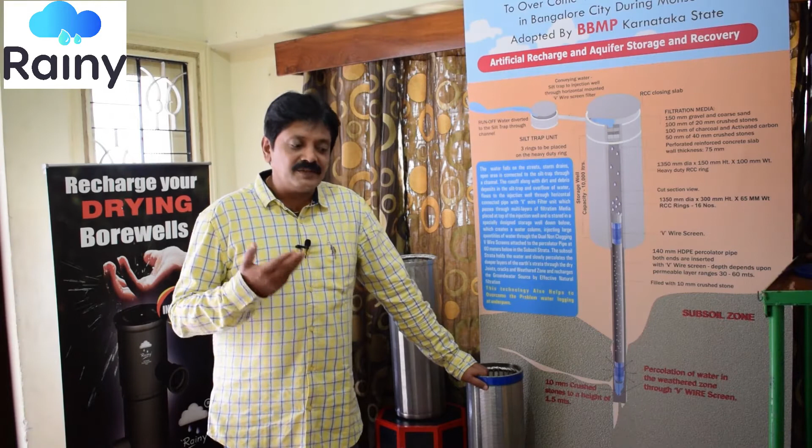In India, more than 65% of the water requirement is met by groundwater today. In industrial use, agriculture use and many of your drinking water needs, we have been using the groundwater. But with the groundwater falling 1 meter every year, the days are not far when we will find zero water in the ground. Why is the groundwater not getting recharged? There are 2 or 3 main reasons.

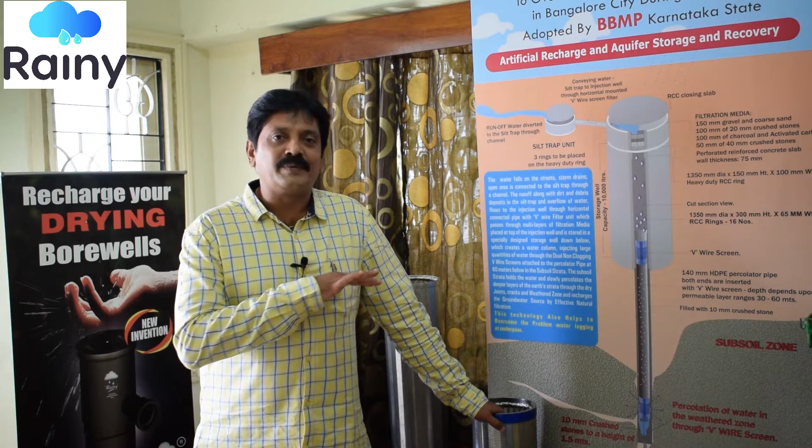One is, if you have seen these days, everywhere we are trying to cover the surface. We are either laying tar on it or putting paver blocks. So we are not leaving any place for the water to percolate. In our school days, all the school fields were open. If you go to any of your children's schools today, you will find that either all the playgrounds are paved, or we have put synthetic lawns, which don't allow the water to percolate. So the water table is falling.

Another reason is climatic change. Though we get the average annual rainfall, and in the last 40 years the rainfall has not come down, because of global warming and its effects, the intensity of the rainfall has changed. Whatever we used to get in 24 hours earlier, today we get in 1 hour. So when we get heavy rainfall in a short span of time, percolation will not happen and the water will run off. That is also one of the major reasons. And people have forgotten to recharge.

Earlier, everywhere we had a lot of lakes. Bangalore was called a city of lakes. We had about 1000 lakes. Today we are left with hardly 141 lakes. We have closed the lakes and turned them into commercial complexes, bus stands, railway stations, major playgrounds and stadiums. We thought that lakes are not very important, but lakes play a very vital role in recharging the groundwater.

Wherever there were low-lying areas in the cities, there were lakes. The water from everywhere used to flow to these lakes and get percolated there. But now with the closing of the lakes, the water percolation has come down. And as I told you earlier, we have paved each and every area; if you go out and see, we don't find any open area for the water to percolate at all. That is one of the reasons the water table is falling very drastically.

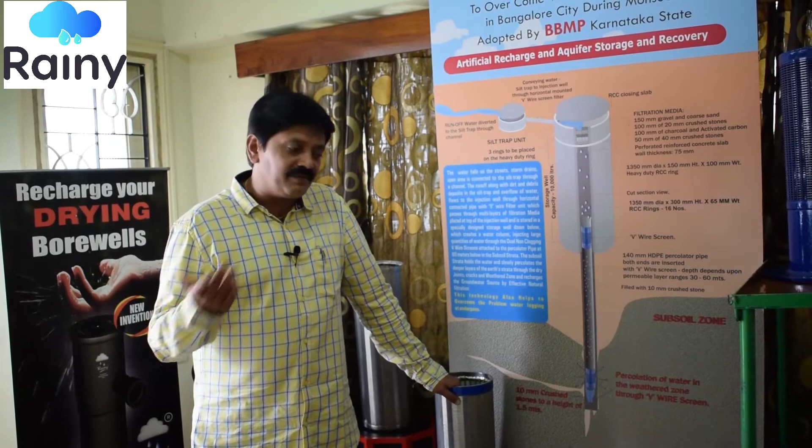Otherwise, we cannot leave the surface running water into the borewells. This is because the water will be muddy, and we cannot remove all the mud, so it will fill up the borewell and close the water sources. That's one. Second is, we don't know the source of the water. The water coming on the surface may be contaminated, so leaving it into the aquifer is always dangerous. We may contaminate the whole aquifer. So what is the next best methodology to recharge the borewell?

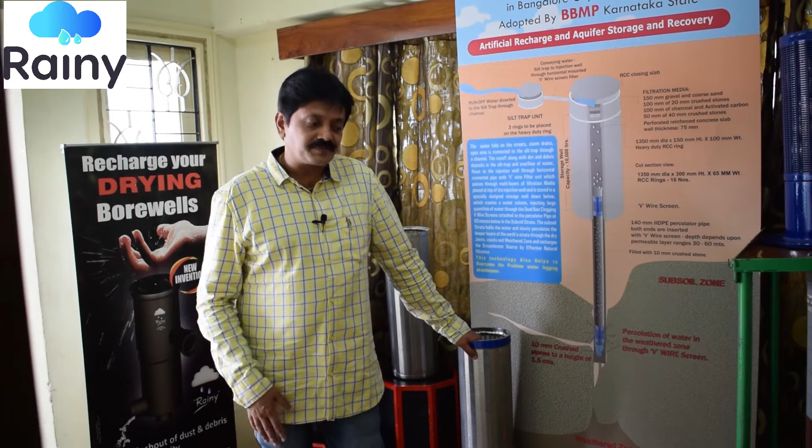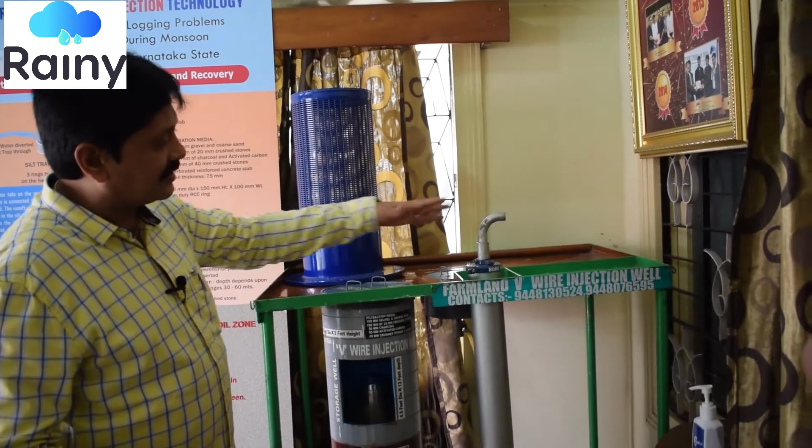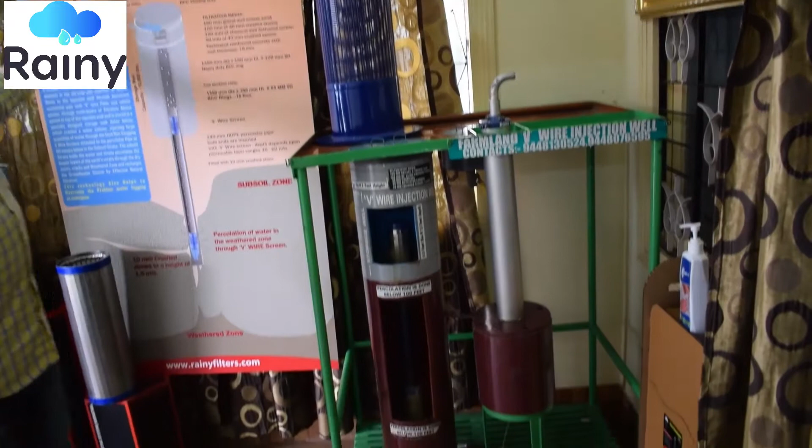Today I will introduce to you a first of its kind innovative recharging methodology, wherein we recharge the borewell, but we don't recharge the borewell directly. If you see here, it's just a model to show you how things are. This is a borewell. We don't recharge the water flowing from the surface into the borewell, but we leave the water next to the borewell. We drill one more borewell. Here you can see exactly what we can do. I can explain here.

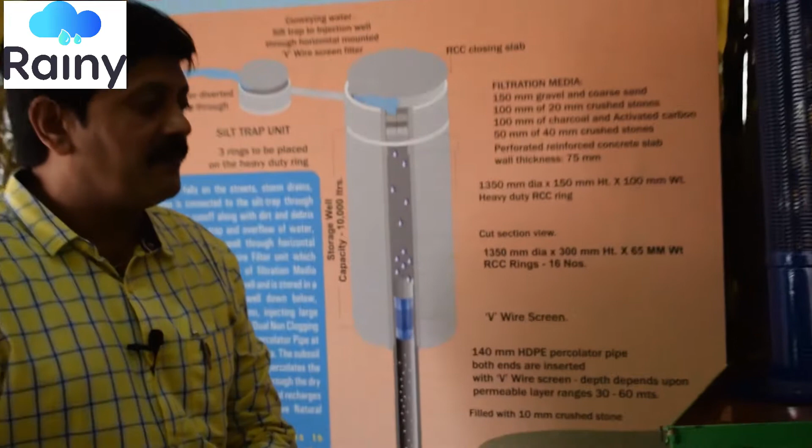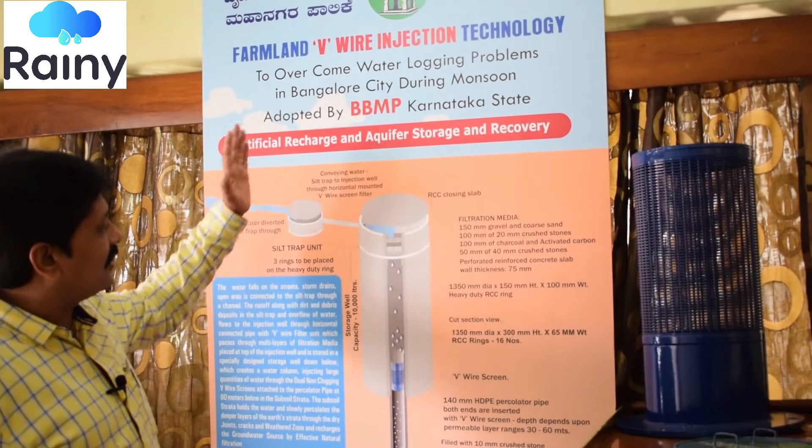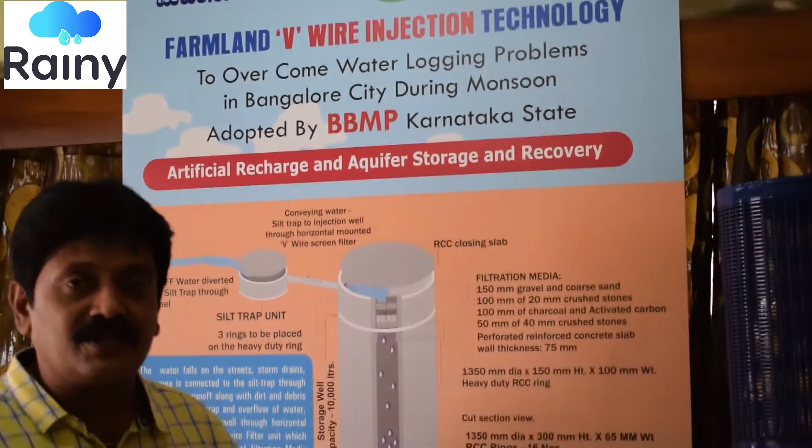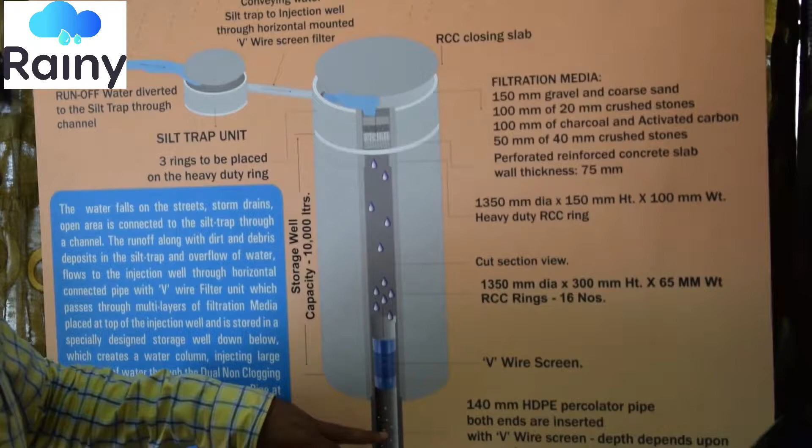We find that zone, and then about 15 to 20 feet away from the borewell, after the geophysical survey, we drill a borewell up to the first permeable zone. We drill about an 8.5 inch borewell to the first permeable zone. We don't go to the aquifer. I would just like to clarify once again, we don't go to the aquifer, but we go to the first permeable zone.

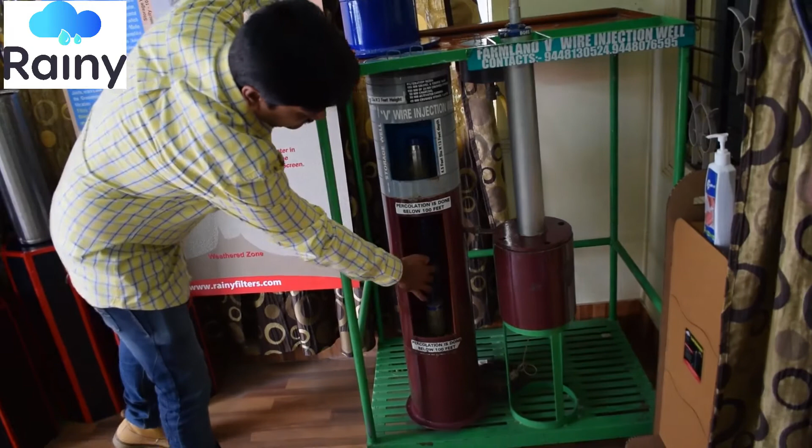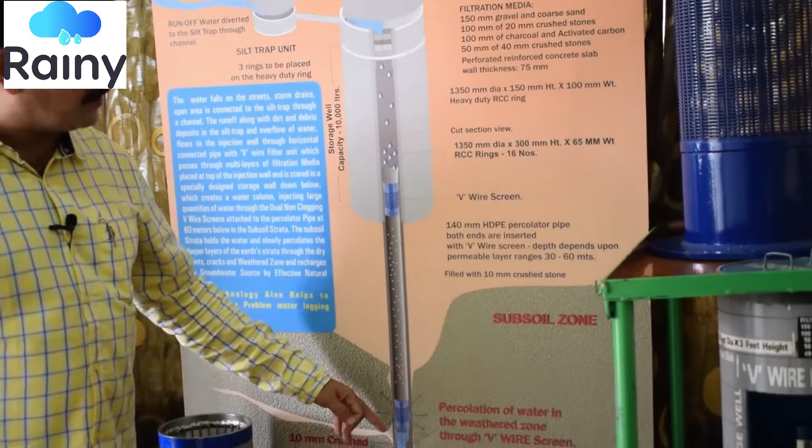After drilling the 8.5 inch borewell, we insert one zigzag perforated high density polyethylene pipe. You can see here the high density polyethylene pipes, which are zigzag perforated. You can see in this picture. This kind of 5 inch pipe is inserted in the 8.5 inch borewell. Before inserting the pipe, we connect one V-wire screen. This is a special component, the V-wire screen, which is made of SS304.

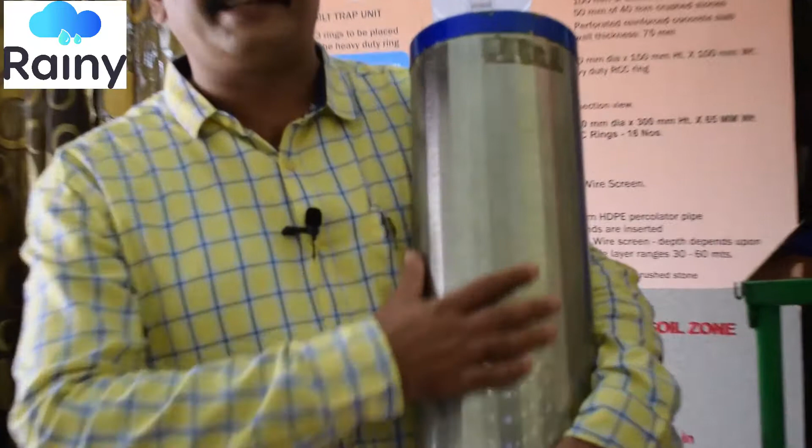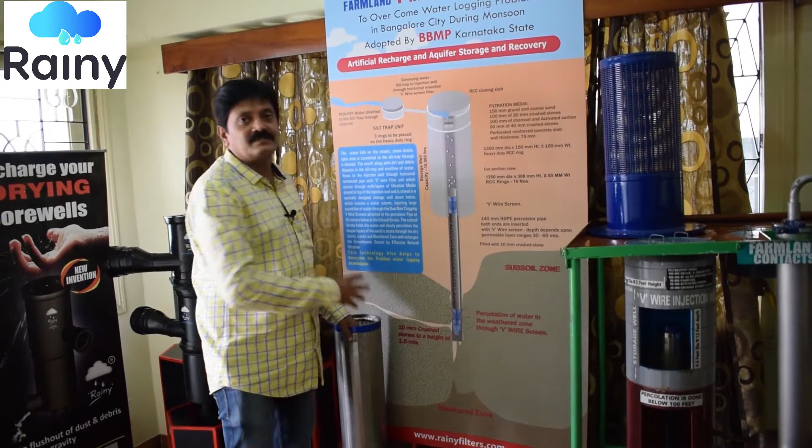If you see externally, it is totally flat. But internally, you can see here, it is V-shaped. So this special component doesn't allow any silt or sand particles to enter inside, but will allow a large quantity of water to get inside the borewell because of its wide opening. You can see it is totally open, externally flat and internally V-shaped. Because of this formation of the V-wire screen, it will not allow any of the silt to enter.

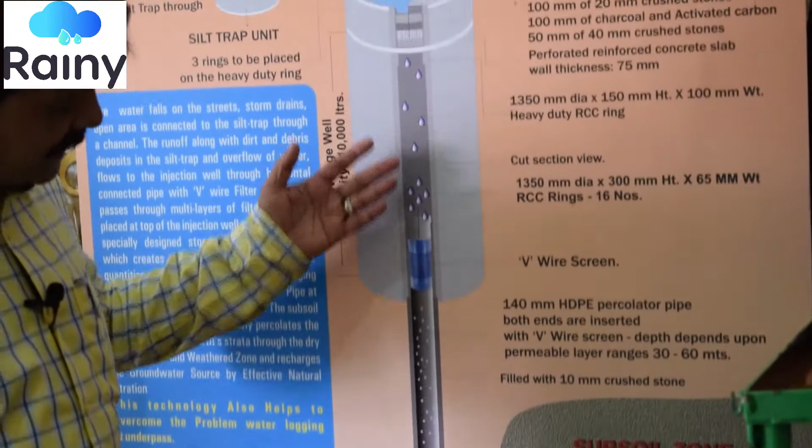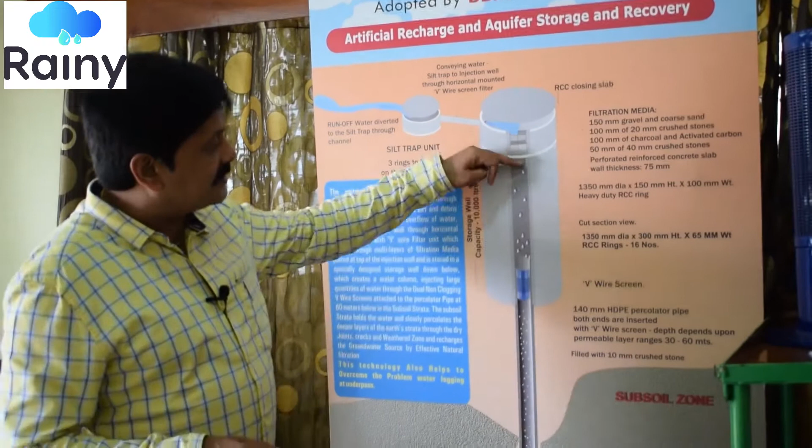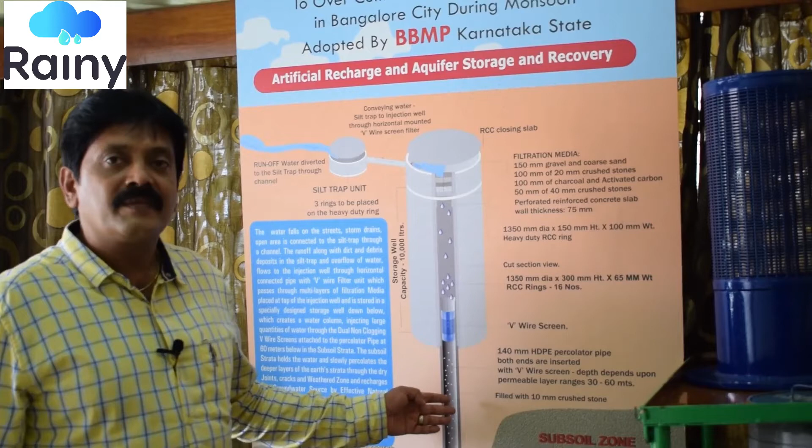So what we do is, when you are inserting the pipe, we fix a V wire screen at the bottom. So this pipe is inserted inside, and there is a gap between the pipe and the drilled bore, because we have drilled 8.5 inches and inserted only a 5 inch pipe. So once the pipe is inserted, we fill the surrounding of that pipe with 10 mm gravel stones. This gravel filling will help us not to allow any of the sand or the mud to cave into the pipe, and it will facilitate the entry or exit of the water from the pipe.

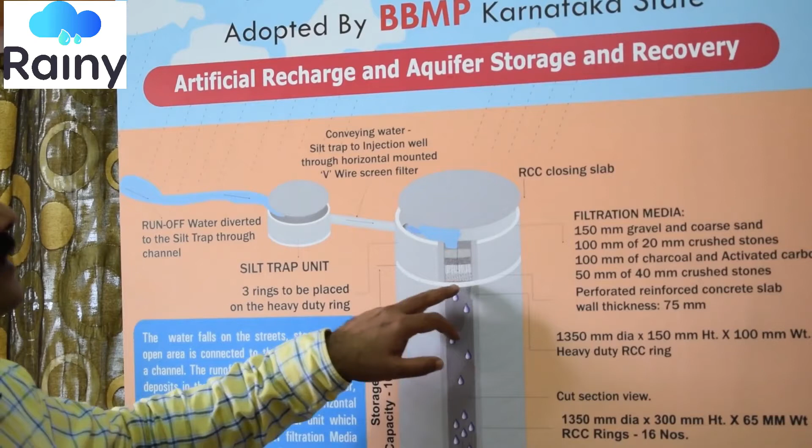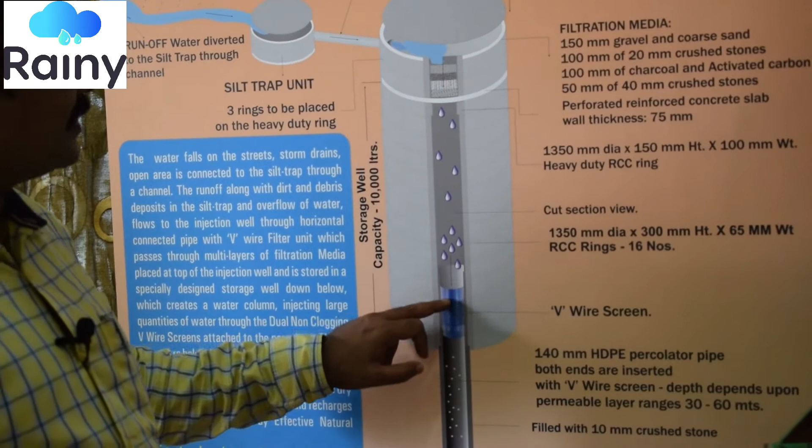So once this is done, we make a well of about 15 feet surrounding this pipe. When the well is completed, we insert reinforced cement concrete rings, one above the other, to about 15 to 18 feet depending upon the soil conditions. Once it is inserted, we insert a perforated slab over it. Once the slab is inserted, we cut the pipe which would have been inserted here, and insert one more V wire screen at the bottom of the well. So this will be the entry point of the water, and the screen at the bottom is the exit point of the rainwater.

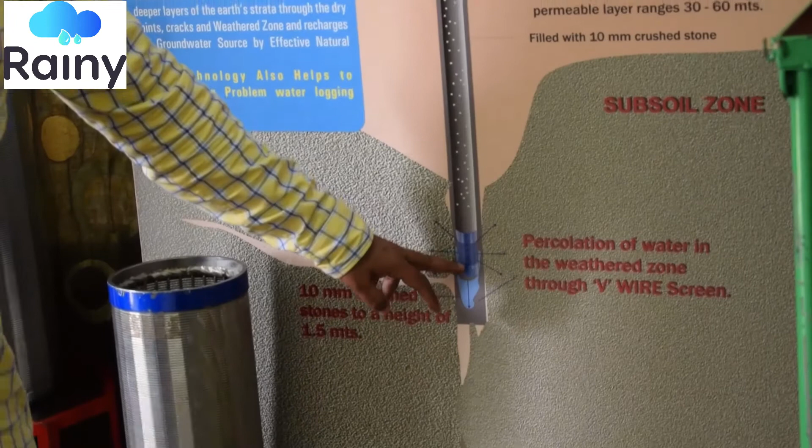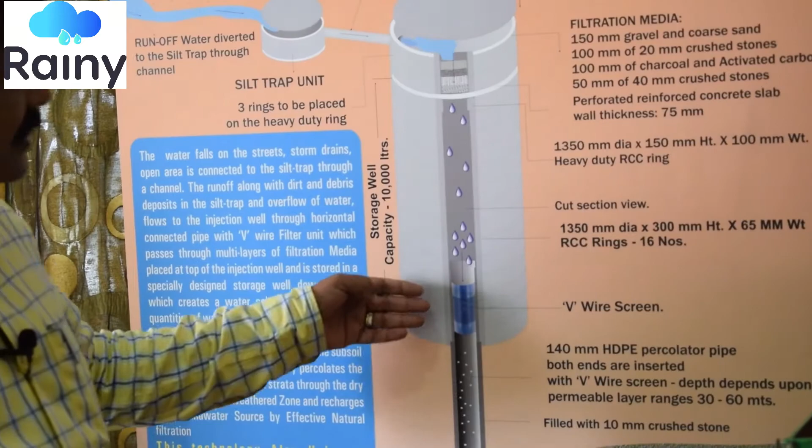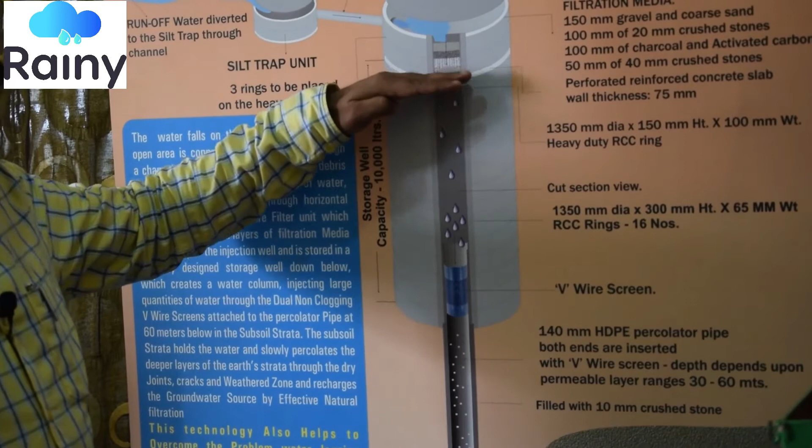Once this V wire screen is inserted, there is an end cap which is fixed to the screen, so that the water from the top should not go; the water should only enter from the sides of the screen. Once this is completed, this well is left completely empty, because this acts as a storage tank, and because of its height, a water column is created. So when the water gets filled into it, it creates that water column, so that it can send the water inside with pressure.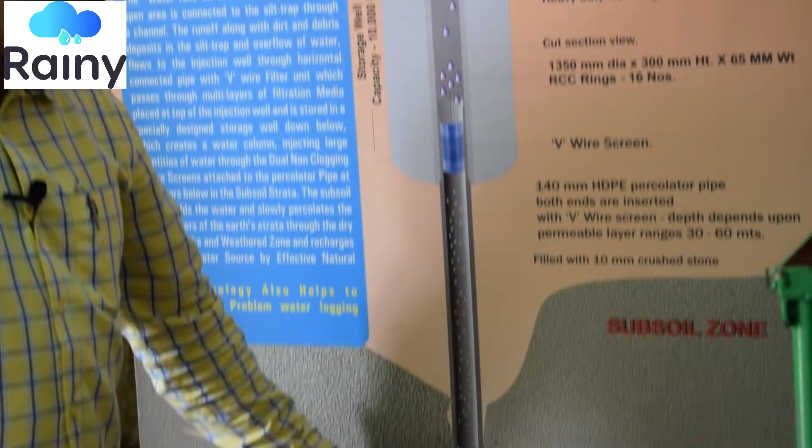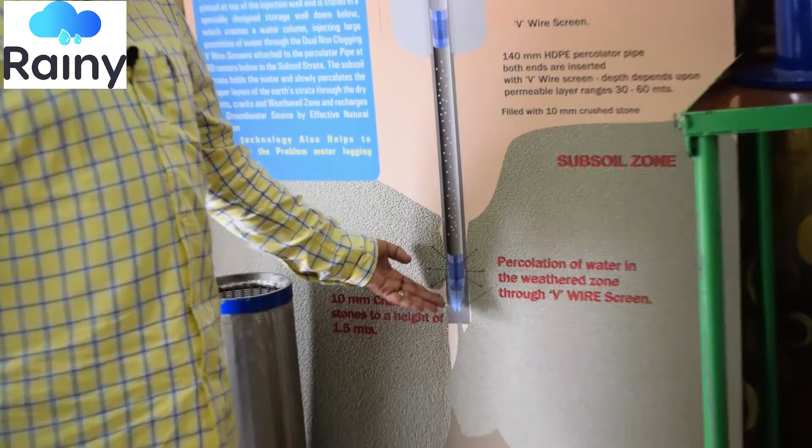When you measure the water pressure here, according to the depth, you will find about 3 to 6 bar pressure at the bottom. So with the pressure, the water can enter into the ground. It will open up the dry joints and fractures in the ground also.

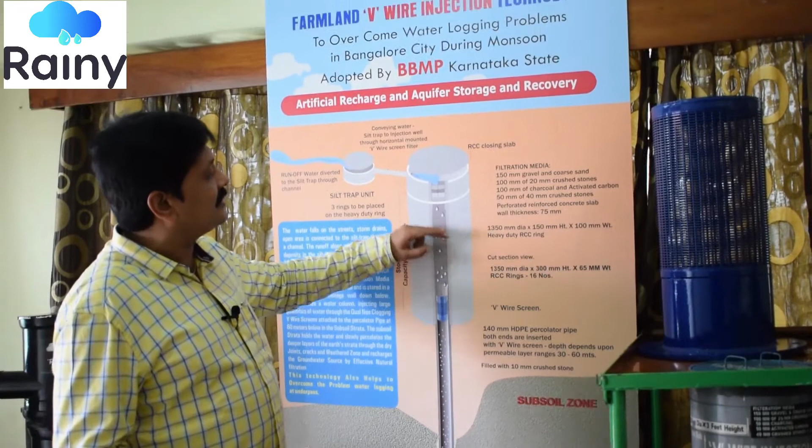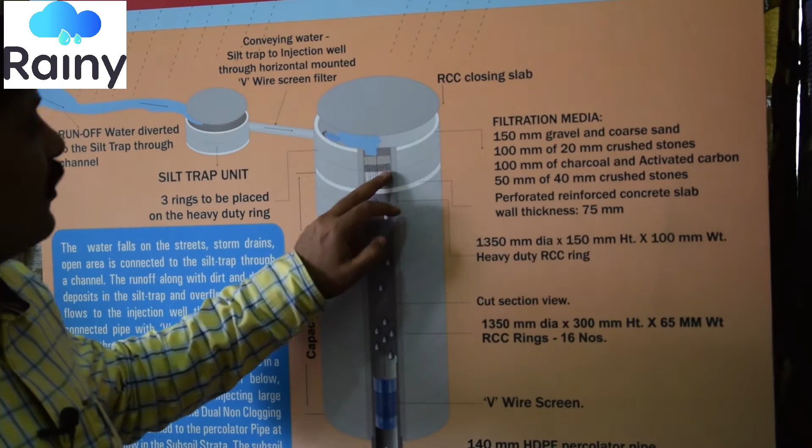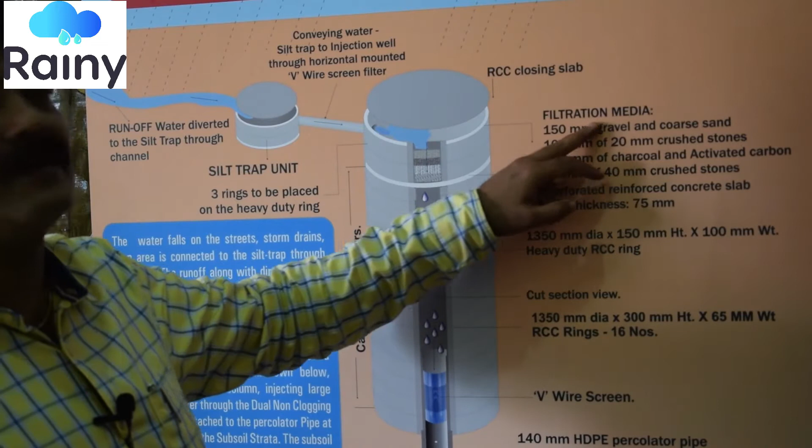So after the completion of the installation here, as I said, once the slab is put, on the slab we put the filtration media. First we put 40 mm crushed stone. On the 40 mm crushed stone, we put wood-burnt charcoal. On the wood-burnt charcoal, we put 20 mm crushed stone, and then we put activated carbon on this. On that, we put gravel and coarse sand. So this acts as a fortified filtration media.

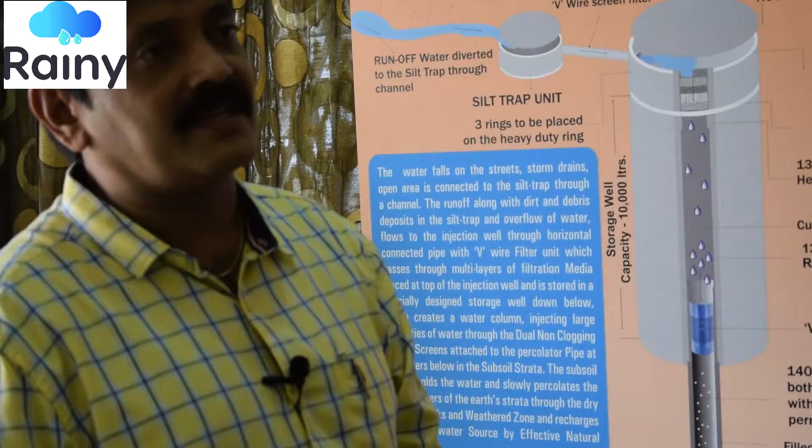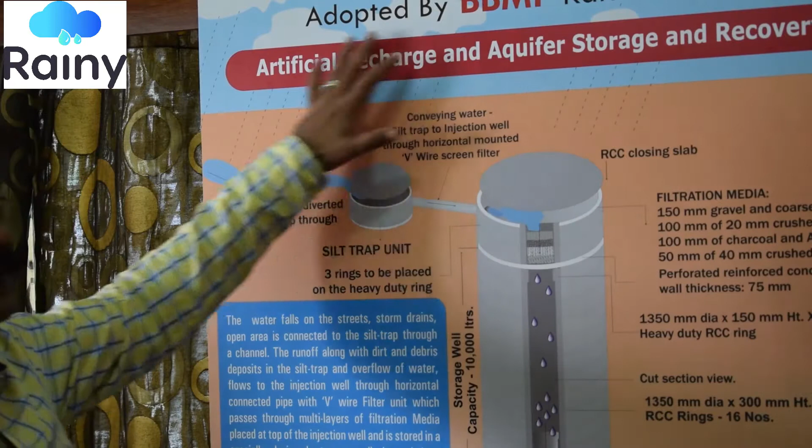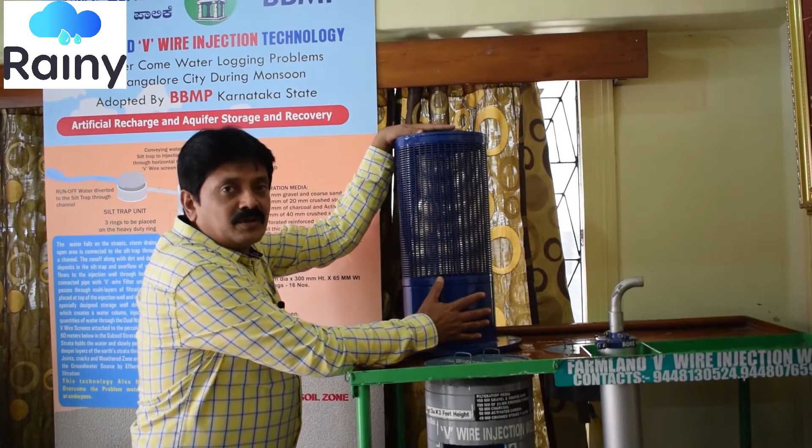To this filtration media, away from this, at the source from where the water is coming, we make one more silt trap, which is about 10 feet in depth, so we allow all the water from all the flowing areas towards the silt trap. In the silt trap, we put one horizontal screen like this. You can see here, this is a horizontal screen which is put into the silt trap. The horizontal screen is adopted here so that it can avoid the floating particles and avoid the choking of the main filtration unit.

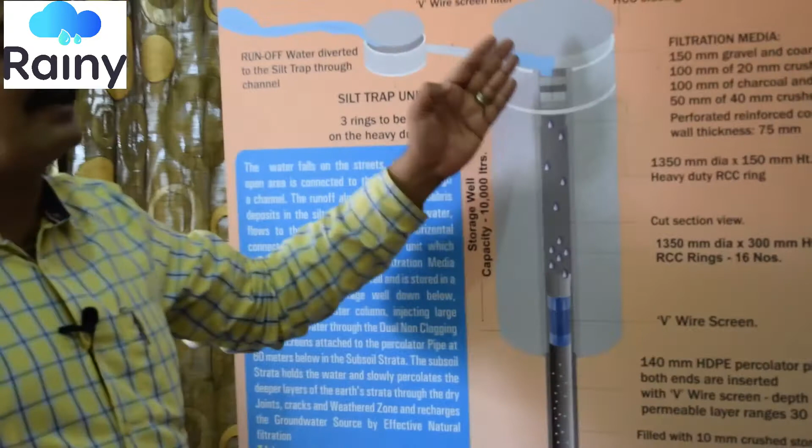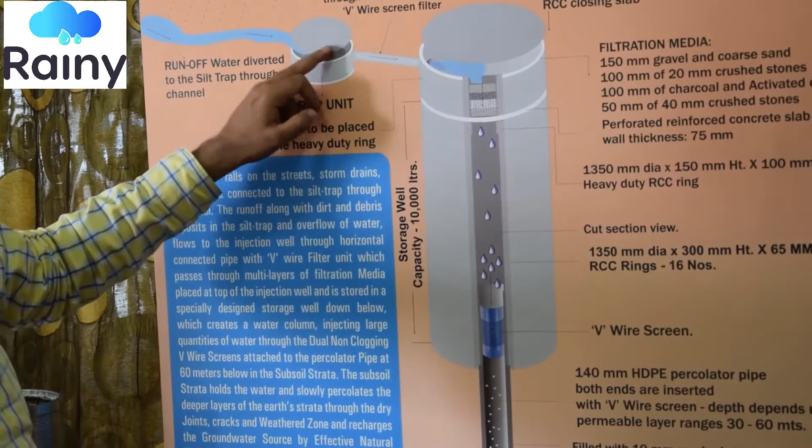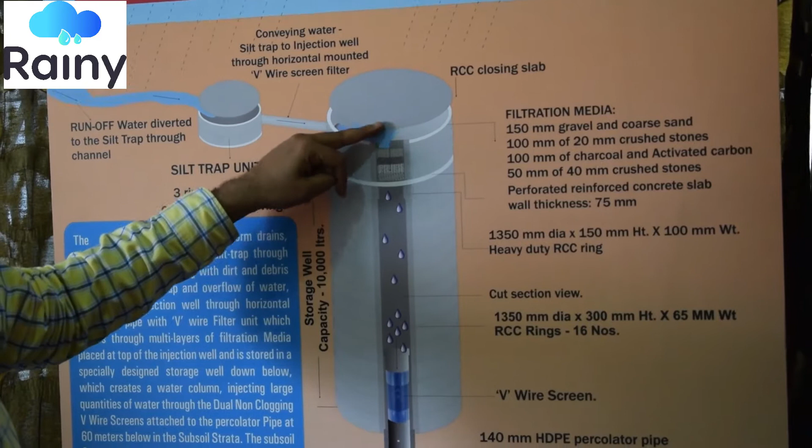So once the water enters the filtration unit, by the siphoning effect, the water goes down and comes up. And when the water goes down and comes up, the heavier particles and the mud particles all settle down, and only the clean water comes here. And whatever floating material there is, is stopped by the horizontal screen, and then the clean water comes to the filtration media. Again, the water gets filtered through the filtration media. Then the water comes into the lower well, which is empty.

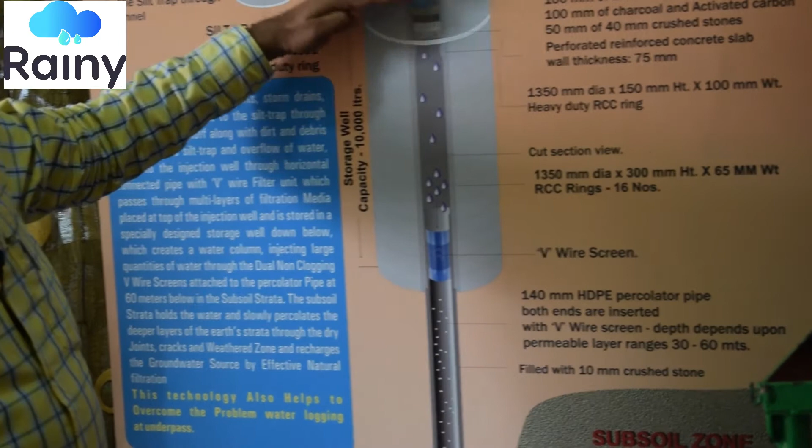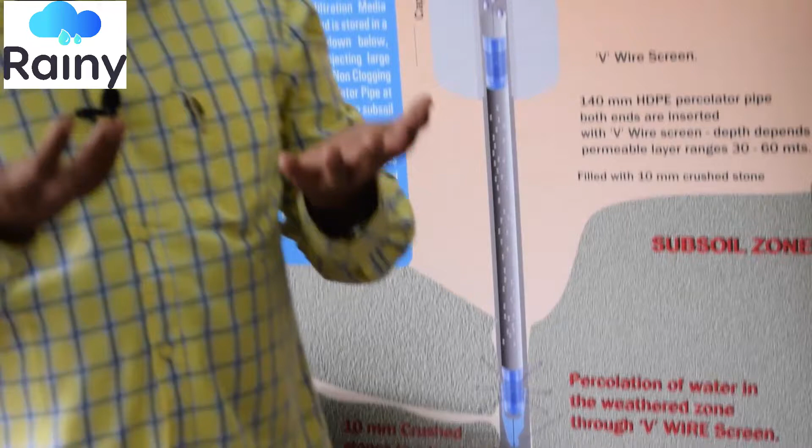As the water column rises here, this water enters into the deeper aquifer. Once this water enters into the deeper aquifer, it gets filtered through the earth crust and then reaches the total aquifer. We are just leaving the water to the first permeable zone. Thereafter, the water gets filtered through the earth crust, because as you know, 1 meter by 1 meter of compressed earth crust is the best filter in the world. No other filter can match that kind of filtration.

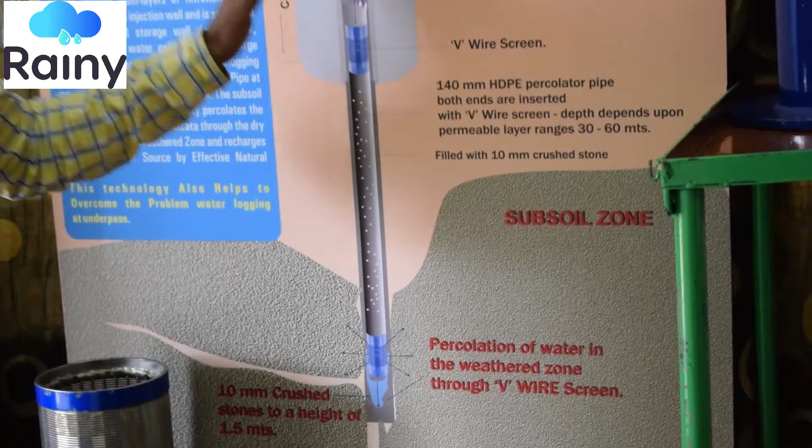So thereafter it has got more than 1200 feet of earth where it can get percolated and then reach the aquifer. We have installed more than 14,700 of such injection wells throughout the country.

We have seen that even the dried borewells have been rejuvenated, and because of this the quality of the water has also improved, because we are leaving the rainwater, which is the purest form of water, and after filtration it goes and mixes with the water. As we go deeper and deeper the quality of the water deteriorates. So when we are adding the fresh water into the borewells, the quality of the water improves and the quantity of the water also improves.

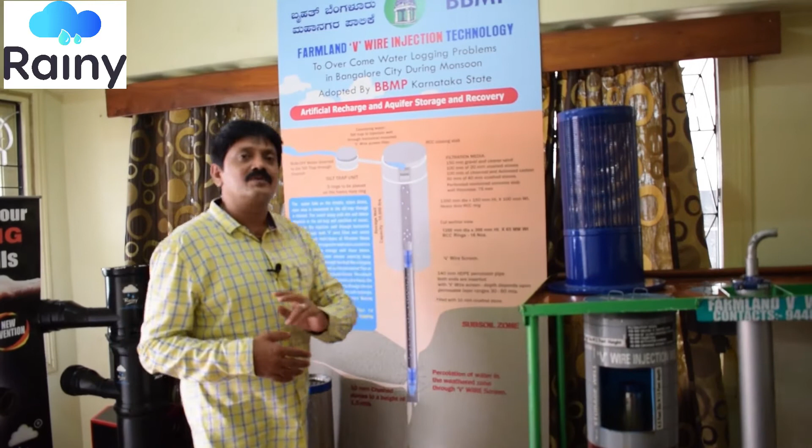This has been very proven, and we have now recently found that this technology is also being used to avoid water logging. Recently we did about 3 injection wells in the underpasses of Bangalore, where after every rainfall huge water used to be stagnant, and they were using heavy discharge pumps to pump out the water.

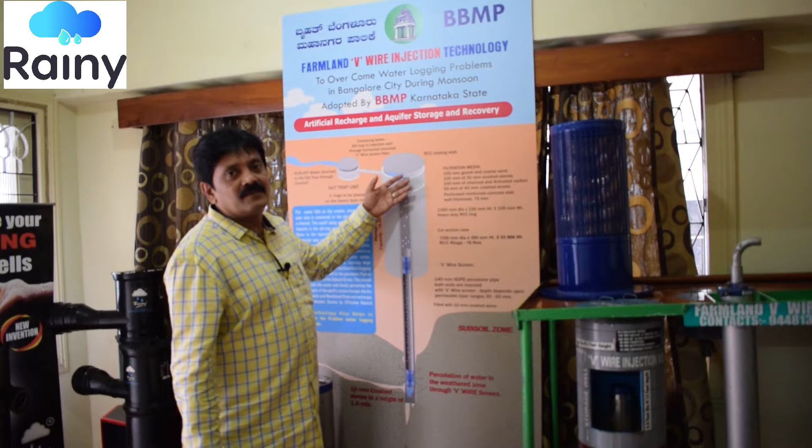So what we did was we installed these V-wire injection wells in the underpasses, so that whenever there is rainfall, we have installed a grease trap before the water goes to the silt trap. The water goes to the silt trap, and then it goes to the main injection well. It gets filtered through the fortified filtration media with activated carbon, charcoal and all. Then the water is led to the first permeable zone.

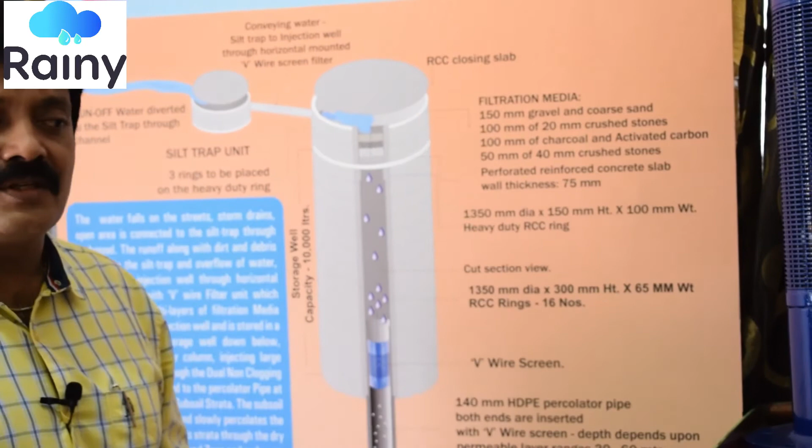So the water which would have otherwise caused water logging, and would have been a distraction for movement of people, especially two-wheelers, now not even a single drop of water gets stagnant over there. So this has helped even in the water logging areas.

We have installed such injection wells in Ahmedabad also, and seen that water logging is not happening at the National Law College of Ahmedabad, and in many municipal areas where there was a lot of water logging, in the underpasses, and many water logging areas.

So it acts two ways: it avoids water logging and it recharges the groundwater. What we suggest is the surface water can be used for recharging the groundwater like this if we install a number of injection wells. So we avoid the water logging and we recharge the groundwater. It is very much needed today, because the water table is falling at a drastic level.

If we don't intervene and adopt these kinds of innovative technologies, the days are not far where we don't find any water in the ground. Whenever I speak, I say if we go further deeper, we'll find oil but not water, because we have already reached more than 1,800 to 2,000 feet. Jokes apart, it is a very sorry state of affairs. We all have to take this up and recharge the groundwater.

I always say that each and every borewell has to be metered, so that we know the amount of water we are drawing. Once we know that, we can always recharge the same amount. Because we are just continuously withdrawing the water and not recharging, we don't know its value. People have thought that earth is producing water, so if you drill a borewell, that is the end of it, the borewell will not dry up.

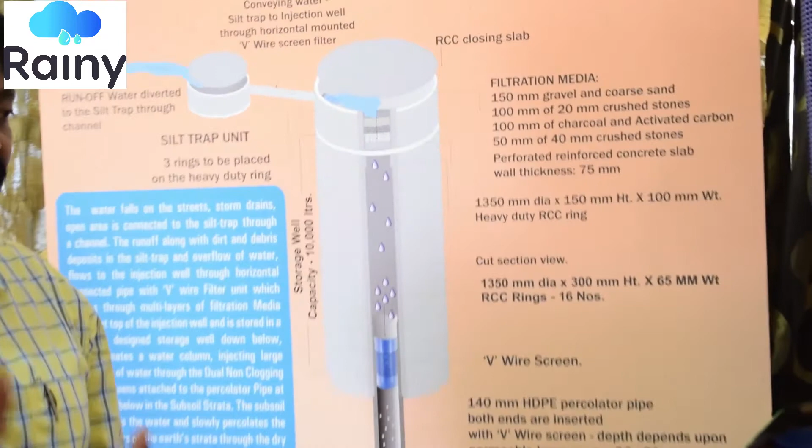But many of my friends have observed that these days, even in the rainy season, a lot of borewells are drying up. So we have to take up these recharging structures and see that the water is not going out. We have to recharge and filter the water. We have to take care that whatever water we are leaving is pretty clean.

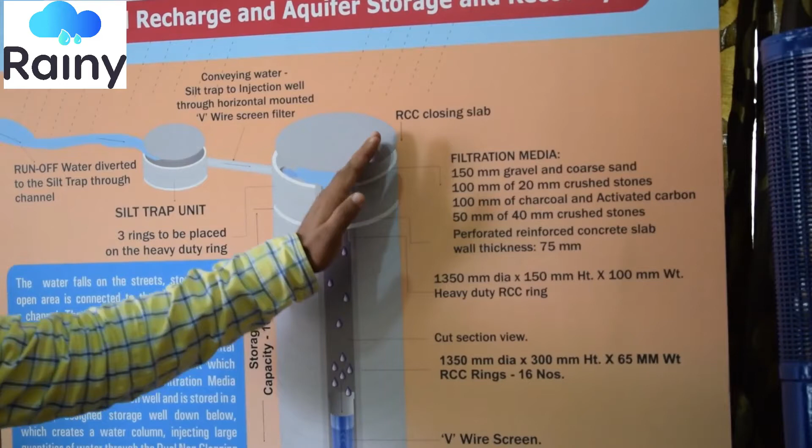If the surface water coming is not very clean, we can keep the inlet of the silt trap at least 1 or 2 inches above the ground. So whenever there is a first rainfall, all this water will go away. Only when there is heavy rainfall will the water come in. During the first rainfall, all the dust and debris would have been washed, so the contamination would have gone, and after the first 5 or 10 mm of rainfall, only the fresh rainfall will come.